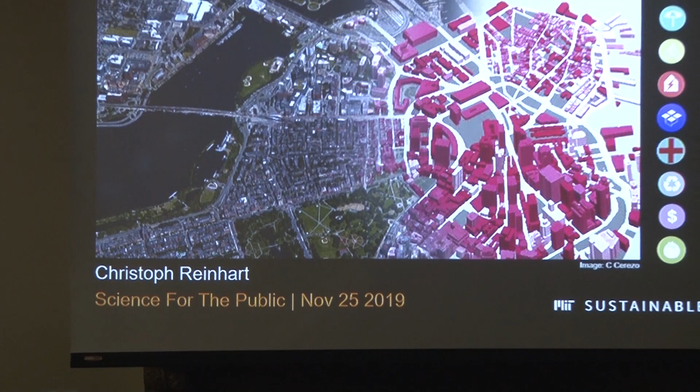The work I'm going to talk about is mostly from our lab at the urban level, but I'll also give a little introduction about net zero individual buildings. As you might imagine, a lot of this work is done by many people. This is the Building Technology Program at MIT, a post-professional degree program where you can get a PhD or a Master of Science in architecture. We have about 6 faculty working in the program on a variety of aspects: energy efficiency in buildings, building controls, natural lighting and daylighting, urban metabolism, and more efficient structures. We strive to bring all this work together with our 35 graduate students by holistically looking at the performance of the built environment.

Since MIT is a small university, we tend to focus on how we can contribute to the world's most urgent questions. So I started out today reflecting on how our work in architecture and urban planning can address the world's most urgent questions. That gets you to the question: what might these problems be? I came up with 3 key concerns for us. There shouldn't be any surprises here, and I'm going to frame my presentation trying to address these issues.

The first one, not surprisingly, is climate change. What does this mean for cities? The last 5 years have been the 5 hottest years on record. In statistics, that's always hard to grasp, but if you look at some pictures, for example from the New York Times this summer during the heat wave in June that kept the whole continent in its claws, you see how desperate the measures are. I think these guys are having fun, but ultimately it's a desperate measure to stay cool and comfortable in cities particularly.

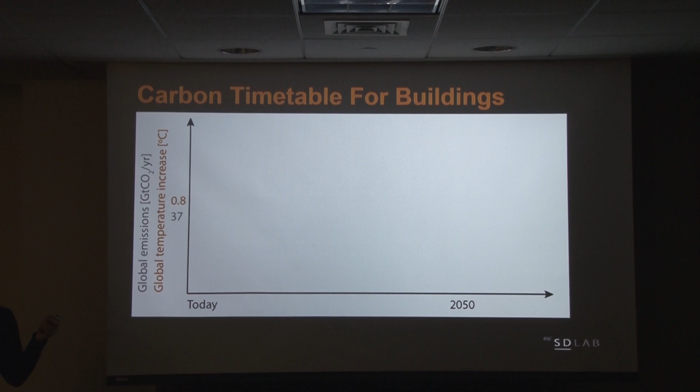And we are emitting every year worldwide 37 gigatons of carbon emissions. And now we have the United Nations, the Intergovernmental Panel on Climate Change, have set us these goals that we want to keep global warming below 1.5 degrees C to avoid the worst, or even worse effects on the environment, on sea level rise, on diversity in animals all over the world. So this is our goal, right?

And if we want to stay under that level, it means we have a total of 580 gigatons of carbon left. And that's really a new concept, because since the 1970s, the limits of growth, we've always been concerned how much gas and oil is left in the world, so how much can we burn? But this concept here basically means it doesn't matter how much is left. This is how much we are allowed to burn to stay under this level. So it changes the way the discussion should be working.

And then one other number, or one number that, if at all worthwhile, this you could take home with you. If we say everybody on this planet deserves the same amount of carbon, that gives all of us 2.5 tons of carbon per capita in a year. That would mean that we are all equal, and this is what we have left for the next 30 years.

And then, of course, there's a scary line. To stay under this 1.5, we have to reach a net zero carbon economy by 2050. And just bringing that home to buildings, buildings currently use about 40% of the carbon emissions worldwide.

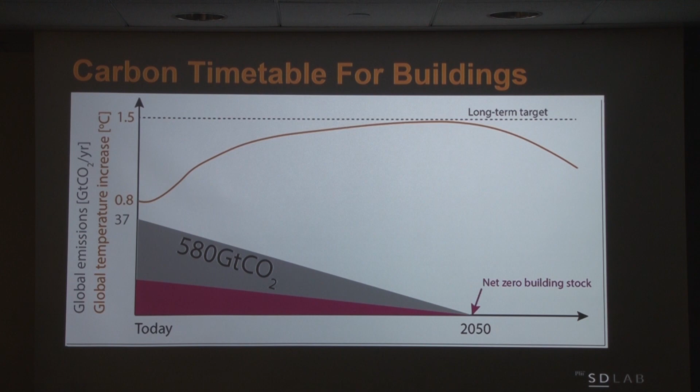Because in 10 years, if you were to do that, and we say you cannot burn any gas in 2050 anymore, you have a system that you cannot even use to its meaningful lifespan. So when you look at a graph like this, it becomes maybe clear how incredibly urgent it is that we're doing something now to the built environment.

So if you actually go historically back and look at the carbon emissions that are emitted by buildings, this might sound like a total pipe dream, because the only times when our carbon emissions haven't risen was during financial crises overall. So maybe the first question is, can we even technologically get to this point here?

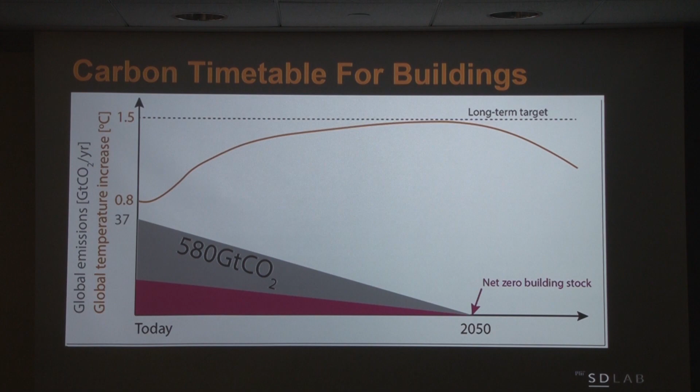Of course, the scary thought again is that in this pink triangle, this includes all new construction. And by 2030, we are expecting to build another 900 billion square feet. So worldwide, we're going to build 3.5 times the US in the next couple of years. And all these buildings have to fit into this small pink triangle. So it's an ambitious goal. It doesn't mean that it's technically impossible, but it's urgent.

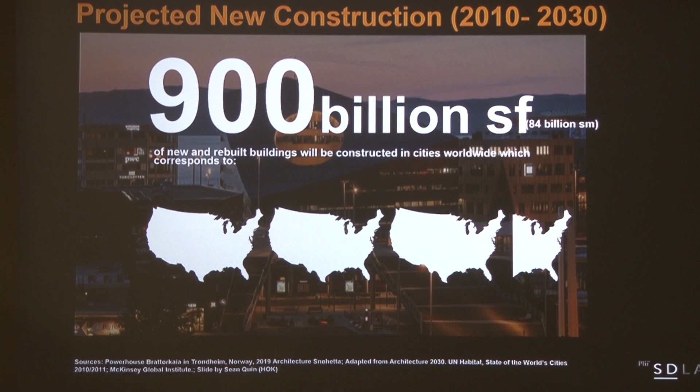So my presentation today, I want to touch on 3 aspects. First, I wanted to talk for just a few minutes about what this might mean, how to get to net zero if you're an individual homeowner. So what can you do today? And then I'm going to expand the analysis to beyond energy and carbon and talk about sustainable cities as a whole. But I wanted to bring these 2 topics together here.

So net zero home, what can you do? Imagine this is your beautiful small New England home that you just bought, hasn't been upgraded, and now you face with your partner your choices.

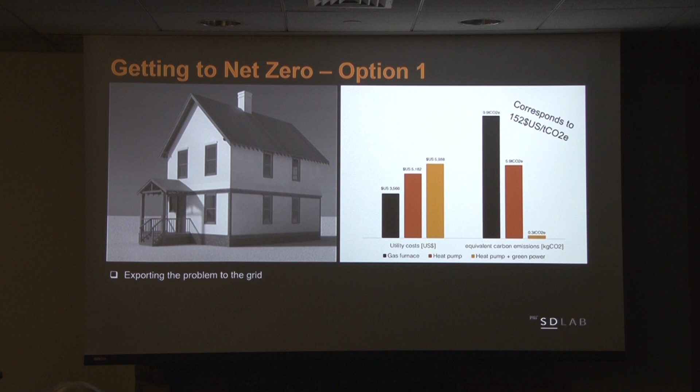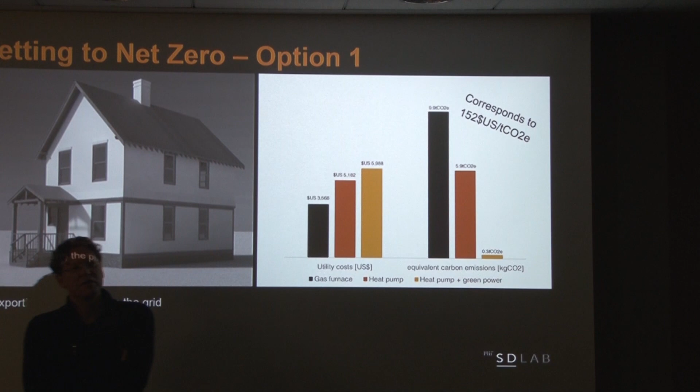What can you do? If it's not upgraded, you'll typically be paying, let's say you have an old gas furnace, about $3,500 a year in gas and electricity utility costs, and you're responsible for 9 or 9.9 tons of carbon. If you're a family of 4, everybody gets 2.5 tons. That means you can't spend any carbon on anything else anymore. This blows your whole budget, so to speak.

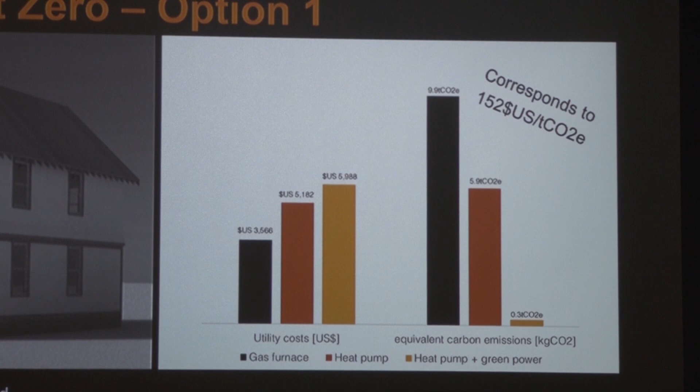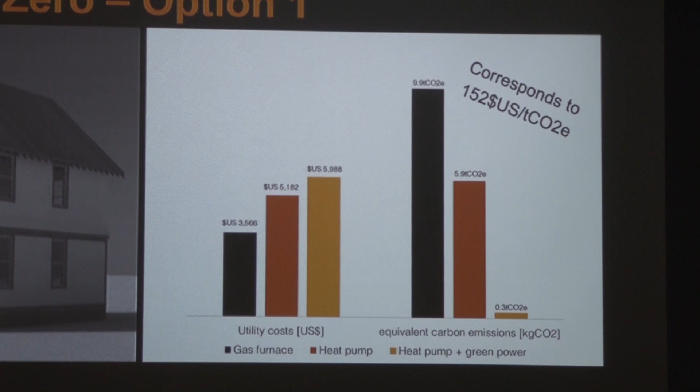So now what are some simple things you can do? You can get a mini split system, an electric heating and cooling system that you put in your buildings, that increases your cost to maybe $5,000 a year. The electric grid here is pretty clean, so that would halve my carbon emission. Just by putting in a mini split system anywhere, that already halves your carbon.

And now if you spend a few bucks more, and in Cambridge that's being offered, I'm sure in Arlington that's similar, if you get basically a green power supplier, then your costs rise to $6,000 a year, but your carbon emissions are practically zero for all intents and purposes. So that's a pretty easy way of getting your building to net zero. You can feel very good about yourself.

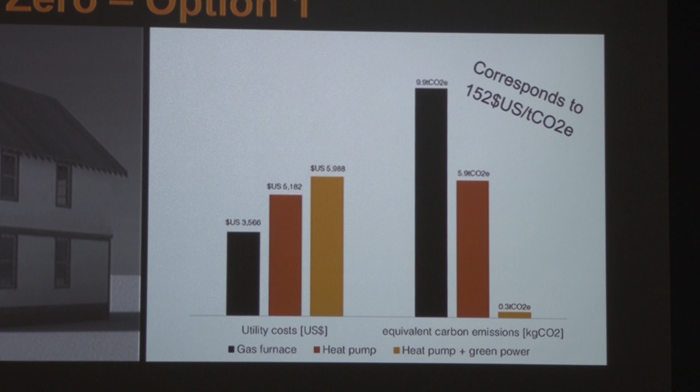What you're actually technologically doing here is exporting the problem to the grid. It means the electric utility, Eversource or whoever you have here, has to deal with all the electricity you are using. You're just putting, so to speak, PV money in the bank, and they have to manage this somehow.

If you want to do more than that, you could also go this long and thorny road to building renovations. You could say, well, I want to insulate my walls, I want to get new windows, I want to weatherstrip and tighten up my building. And when you do that to a good degree level, you have to get a ventilation heat recovery system in there, and then you get the heat pump and the PV.

If you're doing that, you're a way better neighbor. This is a huge effort, so you might not be married anymore by the time you're done with that because the effort level is so high. But this would significantly reduce the footprint that your building has on the grid.

So I just want to give you a sense in terms of options. In both cases, you are net zero, so to speak, but one case is way more thorough than the other nowadays. And of course, when you live in the neighborhood here, you will have a hard time just getting a good contractor that helps you to get to that level efficiently.

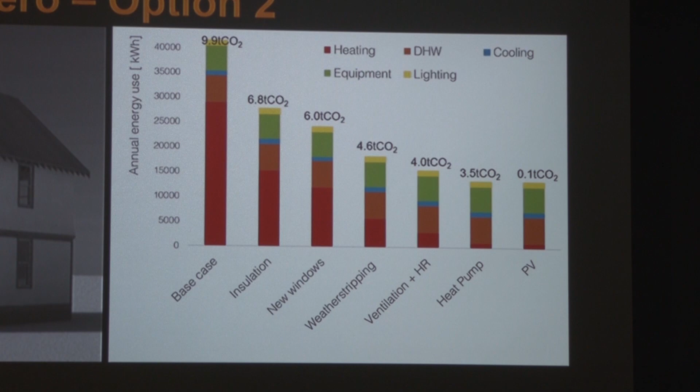So that was more the preamble for individual buildings. What can I do getting carbon emissions down? In our lab, we've been focusing more on this whole notion of sustainable cities, innovation districts, and so forth.

When people are coming to Kendall and to MIT and this whole part of the world, a lot of cities are interested in an innovation district. So what is that? Kendall Square is a great example. Typically, you have a lot of economic opportunities, meaning you have an anchor institution, or several, that provides a fresh supply of a well-educated workforce. You have a startup culture, and this creates a lot of economic value.

Obviously, every city wants something like this as an economic motor, and if we think back, we need this so that we have good jobs everywhere in the world. So then really the environment itself is only there to attract and keep this highly qualified workforce.

So we need a walkable, mixed-use environment. You can have micro-units, meaning since everybody's working in the Kendall Square area all the time anyhow, you can have smaller units overall, but you need vibrant public spaces, organic food, yoga, all these things. And then energy efficiency and comfortable workplaces are kind of the third tier here.

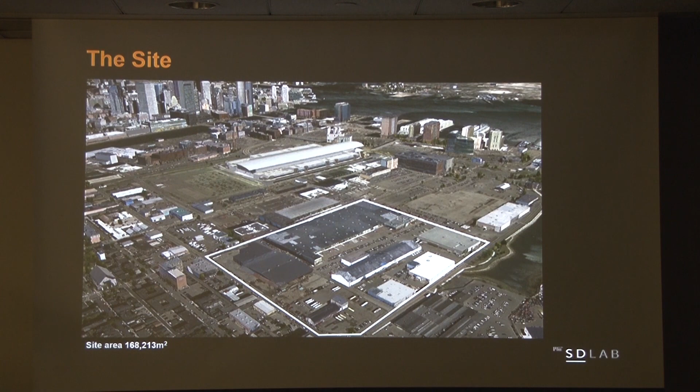And this is what I wanted to show you. As an example, it might be especially easy for you to understand because we picked this neighborhood just next to the Innovation District in South Boston. This is an area that's actually slated for development. It's 170,000 square meters, so 1.7 million square feet. This would be a typical sustainable urban planning proposal for a neighborhood like this.

You could basically get here a mixed-use neighborhood, meaning you have both residential and commercial together. You can have a total of maybe 16,000 people living here, 250,000 square meters of residential, and 130,000 square meters of retail and office space.

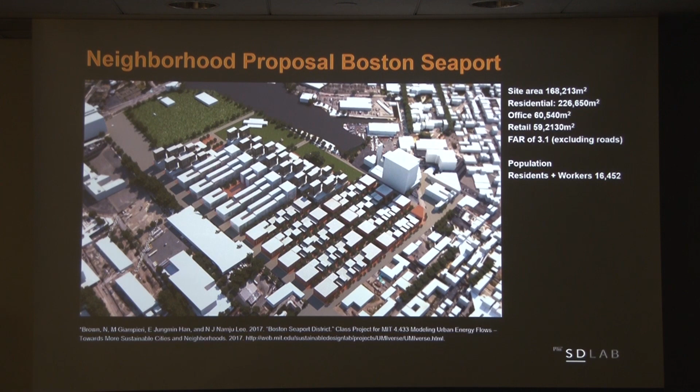So when you look at something like this, is this sustainable or not? It becomes very hard, just by looking at it, to compare different options and say how good a neighborhood like this is. So we're going to look at this under 8 different angles, trying to understand how well this neighborhood performs and whether we could do better. That's of course the key question, especially in urban planning: what are the metrics that shape and form the city?

Maybe surprisingly, energy use is less a form-giver than other aspects. The two main form-givers for cities are actually transportation — how do I lay out a street grid that people can walk and bike through — and streets stay forever. If you look at a street grid of Cairo from 3,000 years ago, it looks still the same. So whatever we decide doesn't change.

And then the next important part is having access to good light. You can always upgrade the buildings after the fact, but if we have certain massings and we don't let light into the city and onto the streets, then there's no way of changing this after the fact. So what we mostly are working with here is access to daylight.

This gets more into the research that we've done over the years: how do I make sure that my city is livable, that we have enough access to natural light, and we're not all the time in the dark? For this to work, we developed this, I would say, 5-point plan.

How do you, as a researcher or as an individual, find a good urban metric? Because right now the literature is full of proposals for how we should look at the built environment. I think you have to go through all these different steps to see that this is a good way of looking at it, that it's a meaningful lens, and that it does what you want it to do.

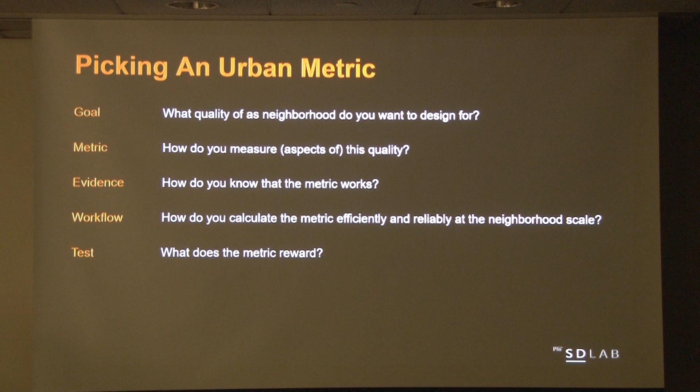So for daylighting, I'll just walk you through the process. Daylighting is providing ample natural light over the course of the year to people in a building. This is one of the oldest concerns in architecture, obviously, especially before electric lighting was invented. The history of architecture was the history of the window, as Aalto said — it's not as extreme anymore, but it's still one of our key qualities.

So nowadays you would look at an architectural plan like this, by looking at the climate and doing a calculation over the whole year, then saying how often people have light in this building. The way we visualize this nowadays: if half the year, when you're in the building, you have enough light, then it's daylit — otherwise it's partially daylit or not daylit. That works pretty well in architectural practice and in the studio. When somebody shows you a building, you can do this quick analysis and decide whether it's well daylit or not. This is a metric that was invented a couple of years ago.

The question was really: does this actually map well with what people say in buildings? So what we did when I taught at Harvard was use Corbusier's Carpenter Center, second floor studio space, which is a building in your neighborhood. Everybody in the class, before they got spoiled with education, just innocent aspiring architects, got floor plans and had to draw where they thought daylighting would end in different spaces.

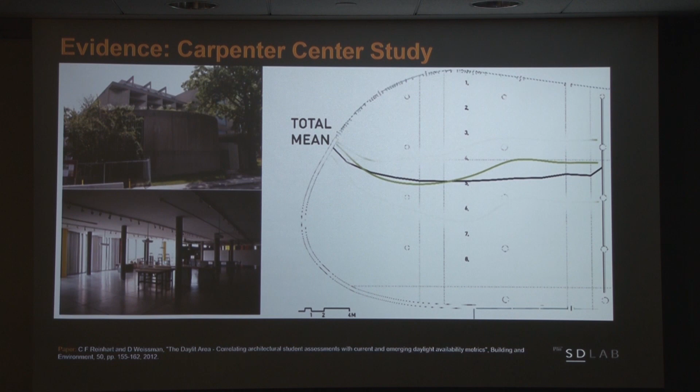We overlaid this and had basically a democratic vote on which part of a building is daylit, and compared that with our computer-based attempt. In this one space in the world, we were really lucky, the overlap was really good.

That was encouraging, so we repeated that with universities across the US, South America, and Egypt, and found similar evidence, which is pretty rare in architecture, that you get to the point where you can say this metric tells you what people think where daylight is. That's pretty useful, because ultimately we do all of this for the occupants in the building. So we were happy that we had that.

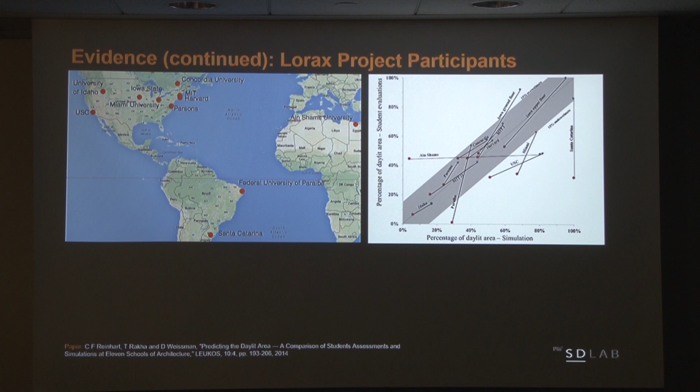We then found a way to do this type of analysis for a whole city. So what I just showed you, I can now pretty effectively do for the whole of Manhattan, for example. I can tell you how daylit Manhattan or downtown Boston is.

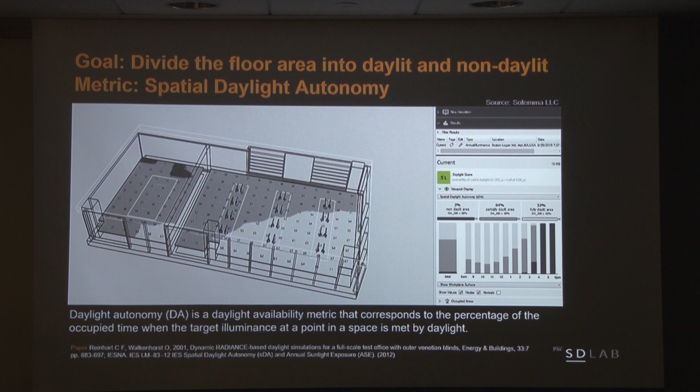Now that we have this tool set, we wanted to understand what are the cities or urban forms that are getting rewarded by this metric. Some of you might know that the oldest urban zoning regulations for getting access to light and air at street level in cities come from Manhattan.

These regulations were from the 1910s. Manhattan was the first city that said, because of very dense urban canyons creating unlivable street conditions, you have to widen the amount of light you get at street level. If you look at a building like the Rockefeller Center, it's basically built according to that, with a step back — that's the maximum the developer was allowed to build. So we wanted to see, can you build in Manhattan denser than the Rockefeller Center?

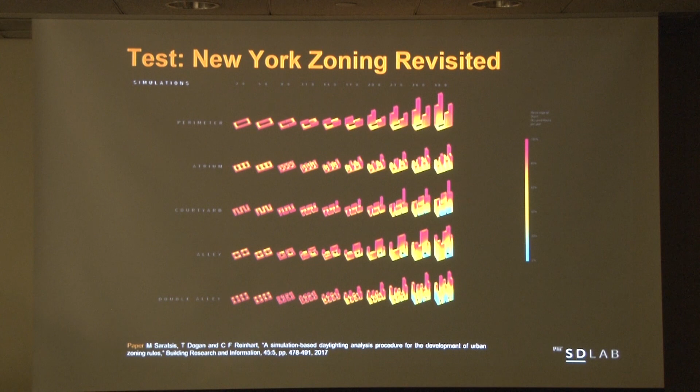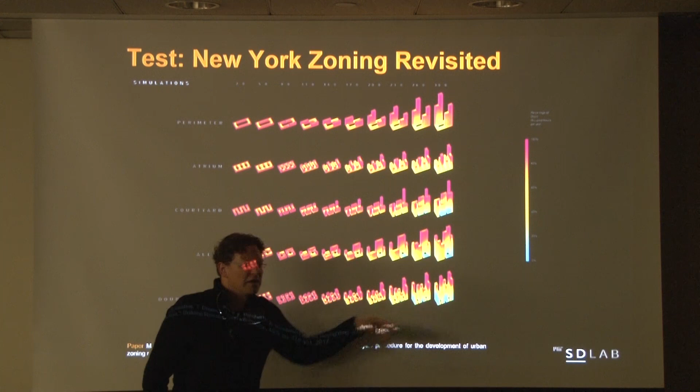For that, we looked at different typologies. Here you see various urban setups, where the same architectural idea grows. These buildings become incredibly dense, 3-4 times denser than Manhattan if we were to build a whole city that way.

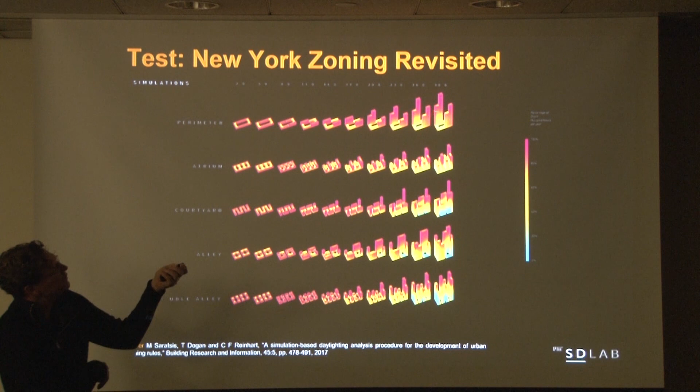We wanted to see if there are urban forms that are good for lighting or not. I'd like you to pay attention to this top form — that works very well. These are effectively several stories of commercial base at the bottom, then a stacked, very thin tower. If you look south of Central Park, that's the kind of urban typology you see. Now I'll show you how good these different typologies actually work in a city.

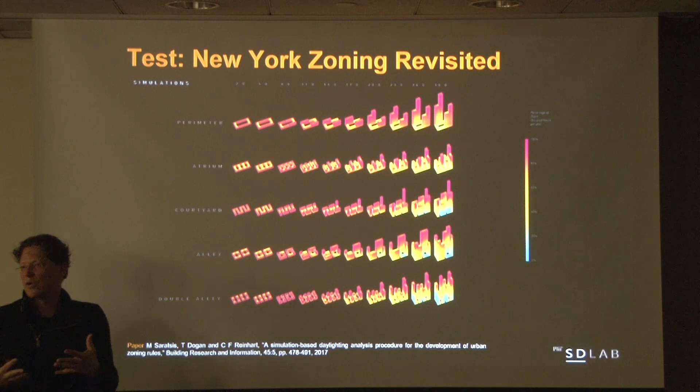Here we see them growing by density, and this is a good lighting level. The top form I showed you, these thin towers, perform way better than the others, to incredibly high levels — this is the maximum you can build in Manhattan. So we could basically double the density in Manhattan if we built according to that.

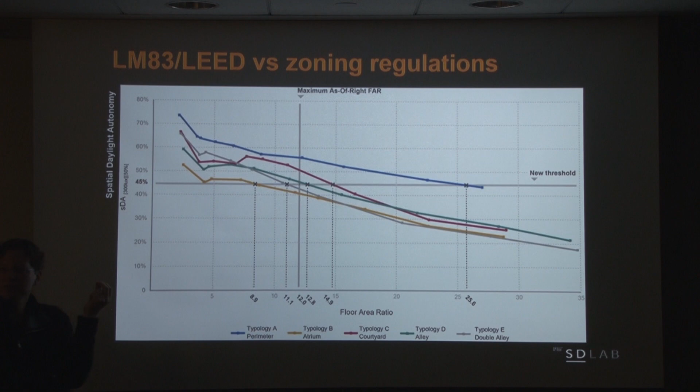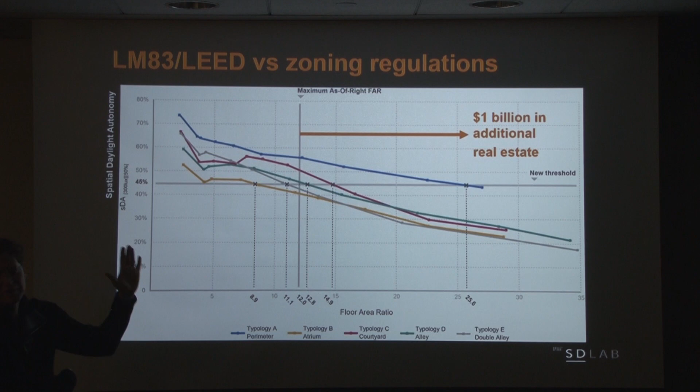That takes me to the earlier notion that we have to house a lot of people in cities. We don't want urban sprawl, so we have to densify. There are ways of getting a lot more living space into cities if we build that way. And of course it's interesting from a developer standpoint too — you're creating, if you do that in Manhattan, $1 billion worth of real estate per building block. So that doesn't hurt if you're the developer.

If I apply that to the neighborhood I showed you before, when we were asking whether it's a good neighborhood or not, it turns out it's not that great — basically not Gotham yet, but barely acceptable. The reason is there's a height restriction here: you can only build up to 7 stories high. So if you have to design that much floor area, you basically box yourself in, literally speaking.

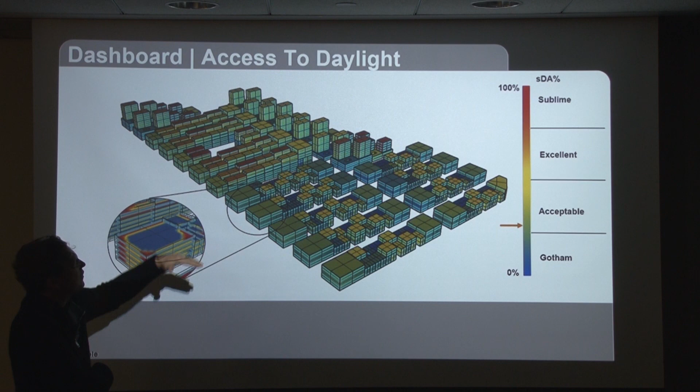That just shows we have to do educational work with cities, explaining that you have to relax some of your growth and height requirements if you want density and light to work together. Because the fear is, of course, that if you allow higher buildings, everything is just going to rise up. You just have to find something more clever than that.

So now we have some light, hopefully, in buildings. But what do we actually know about how people use buildings? What if we design all the spaces and nobody's there, ever?

That is hard, and it's a moving target because working patterns are changing. We always say in the lab, most students don't like to come in, or they spend some time there, but they think their most productive time is elsewhere, like a coffee space, working uninterrupted. So we just have to accommodate these changing working patterns and understand when people are where in buildings.

In order to do that, we worked here at this place in Cambridge that you might know. This is the MIT North Court. It's located near the Stata Center and the Koch Institute.

It's a public space, and it's very vibrant. There are all kinds of benches here. It's being used extensively by people from the whole Kendall area as well as the MIT community for lunch, because there are 2 public cafeterias there, and you can sit inside and outside. So for us, that was a perfect spot to study, because whoever is sitting outside has the choice, since they could sit inside as well.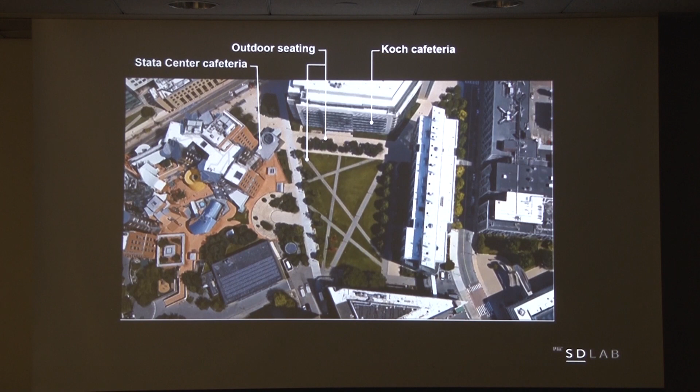So when we wanted to understand how people use dense spaces like this and when they use them, we used 3 of these Soofa solar-powered benches that you might have seen. There are more and more in Boston. These are red benches with solar power where you can charge your iPhone, and they also have a Wi-Fi tracker in there.

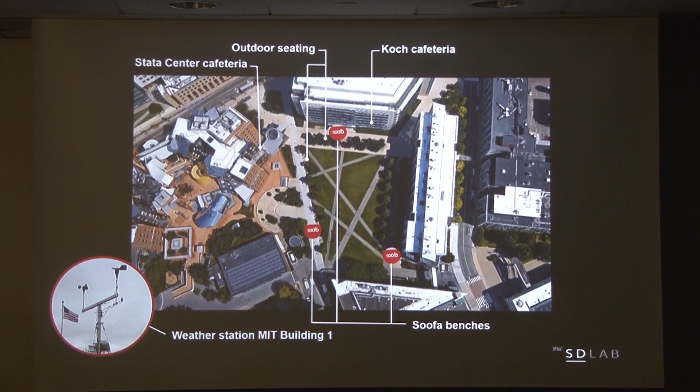So what we've done is have Soofa collect, for 11 months, all the signals that smartphones were sending out. This is maybe a little lesson in privacy in the modern age. If you have a phone and the Wi-Fi is on, your phone screams non-stop into the world, 'I'm a phone, and this is my MAC ID.'

Now, we didn't keep the MAC ID. We just changed it into an encrypted ID number, and we threw it away after the study. There are lots and lots of companies that collect this all the time. You can put a Wi-Fi sensor in front of your living room and collect everybody who walks by. That is totally legal and fine.

Just to give you a sense, in this case, this is what we collected, and this next graph shows you what you can basically gather here. So we collected, in 11 months, 30 million probes. We had to clean them up to 14 million probes, and we threw away the weekends since we were interested in weekdays.

And then we got 670,000 visitors to MIT and 16,000 regulars. How do you know what is what? Because your phone gives you the same MAC ID, so you can say this is somebody that is here at least every 2 weeks.

From a scientific standpoint, this is absolutely great, because we wanted to know how the regulars use the space, and usually cities don't know that at all—when and how it's being used. We wanted to know it for the regulars, because when you're visiting from far away and it rains, you're still going to go there; you're not going to say 'I'm going home.' Whereas when you're a regular, you can decide, I want to have lunch outside now or not. So it becomes very specific.

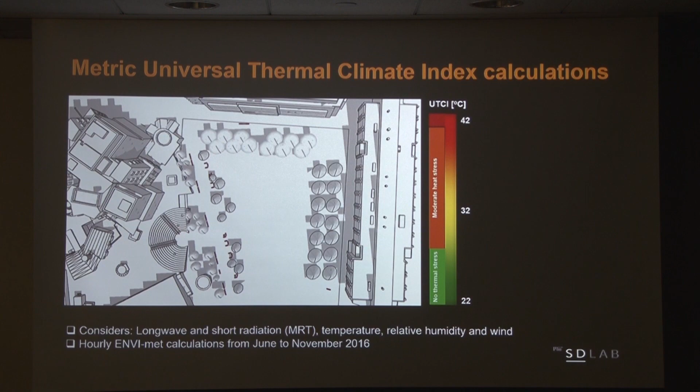So this is how this looks, where it's wet, it's hot — this is just to give you an example. We did that for the whole year, and the work was done by Jay Dhariwal from our lab. He spent 1.5 years on the next graph.

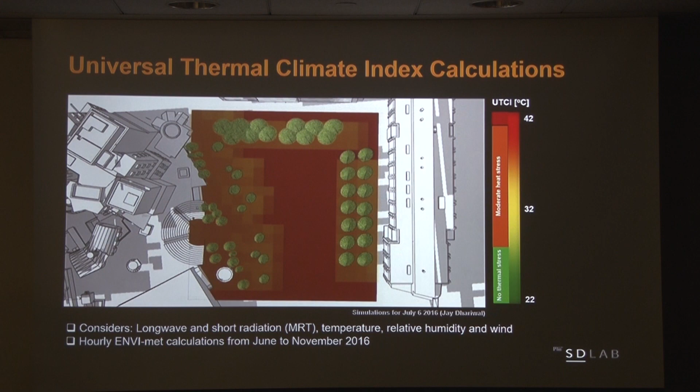So with this, we could effectively show that this metric is exactly what you should be using to model outside conditions in cities anywhere. You can, for example, decide where to put the next public library, whether the library should have a cafe so people actually stay and support it, or where to plant trees so people walk along that way, making it a more walkable city. That's a really powerful tool overall.

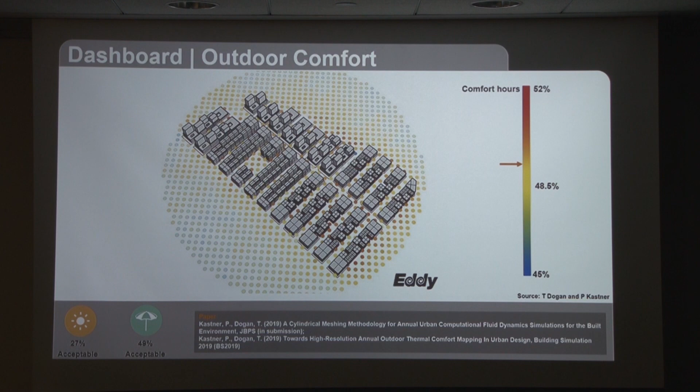So now at least we have a good, powerful urban metric. When I apply it to this neighborhood, it's not that exciting, because it wasn't developed with this metric in mind. It effectively tells you that half the year, on Boston streets, it's not comfortable — which, as you live here, you know is true. So we should be more deliberate about putting in shading systems, heating pavements. I think there are a lot of interventions we can do, because the value we create for society by getting people walking is substantial.

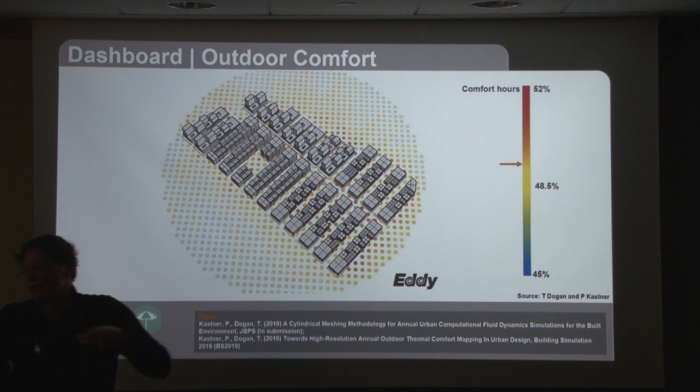So this leads me to metric two — the others will be a lot faster. Now we basically can say we know how to get light into cities, we know how people are comfortable. Now we have to give people destinations — that's the next step, because people need a reason to walk out. There has to be a restaurant, there has to be something.

Fortunately, there is a metric called Walkability and Walk Score. I'm not sure if you know it — it's called walkscore.com. You can look that up for any address in America, and it basically gives you, for an address, how many amenities you have in the neighborhood — how many schools, restaurants, and so forth. Then there's a fall-off: the further an amenity is, the less it counts.

What do we know about how this metric works? Well, we know that people who live in a neighborhood with a high walk score weigh on average 6 to 10 pounds less — that's a very indirect metric, but that's what the statistics tell us right now. We also know that a point of walk score adds $3,000 to the average real estate value of your property, and typically a walk score goes between 0 and 100, so that's not nothing.

And yeah, you have to be careful — this was developed for the US. We've done this in other parts of the world as well, such as the Middle East, where the distances people are willing to travel are a lot shorter overall. So if I apply this to my neighborhood here, everybody was super optimistic — this whole neighborhood is basically covered in cafes and restaurants. It's very walkable.

We don't have yet a finance model that sees how many of these cafes are actually going to make it, but in principle, when we start out, this is walkable.

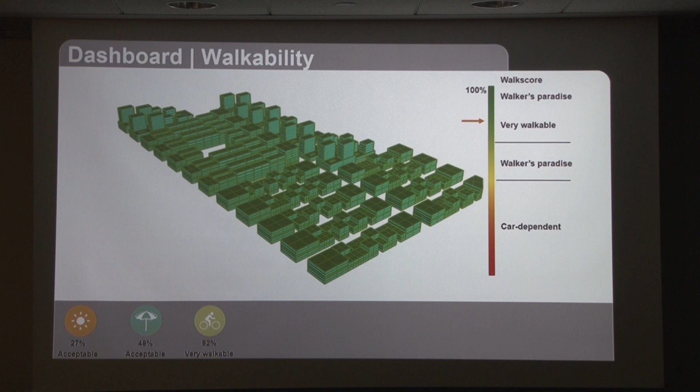So now we get to energy. Energy for new construction is a lot simpler than what I showed you before. When you have an existing building, it's a very tricky thing. You don't want to take down the existing building, but upgrading a building is very costly and very complicated.

Defining a stringent building code is a lot easier, and we know from studies in California and all over the world that people follow, thank God, the building code. So for example, if in Kendall we say every new building has to be LEED Gold or whatever, people build to that level, and then we know the energy use is there. It's the hardest problem for us getting the existing buildings up to speed.

So that means in this neighborhood, since we're building it from scratch new, we are assuming slightly better than Massachusetts code. We get pretty low energy use overall.

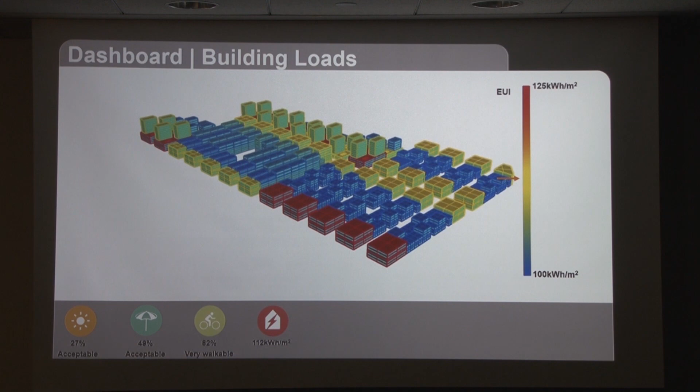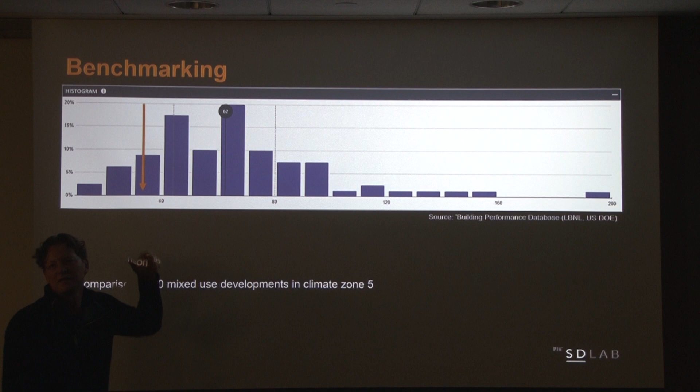And then the way you would now judge, is this a good energy use per square meter compared to other neighborhoods? There are data sets out there that compare mixed-use neighborhoods all over Climate Zone 5, which Boston is located in, against your target. So you could say, well, this looks good, I'm in the top 20% or so. This is a way an urban planner could gauge whether this is efficient as a building stock or not.

Now the next part, that we are starting to discuss more and more, is where's the energy coming from? When I said earlier, well, I buy a heat pump and I buy green PV, photovoltaic, that exports the problem.

What that means is somebody, the grid utility, has to be responsible for getting us clean energy and using this clean energy, and that's a difficult problem. With photovoltaic, it's easy to understand: the sun doesn't always shine, but people want always energy. So there's this mismatch, and somehow we have to bring those together.

So we looked here at 3 different systems that are currently under discussion for a new neighborhood. The default would be this: by default, everybody, that's probably what you have at home, you have a gas boiler in the basement, and you just get electricity from the grid. That is pretty normal. Now what you can do instead is go what is called all electric.

So you throw away your gas boiler, or you never had one, and you basically have heat pumps—electric heating and cooling systems. If they are large, they use heat from the ground; otherwise they can just get heat from the ambient air. In that case, I only have electricity, and I heat and cool buildings with that.

Or, and this is what you typically find when you have one joint owner, for example Harvard, MIT, the utility buys gas and creates its own electricity, heating and cooling centrally with a district system. That is very common: you have one central plant that creates heating and cooling, and then steam pipes connect to various buildings. That's what we've done for at least 50 years.

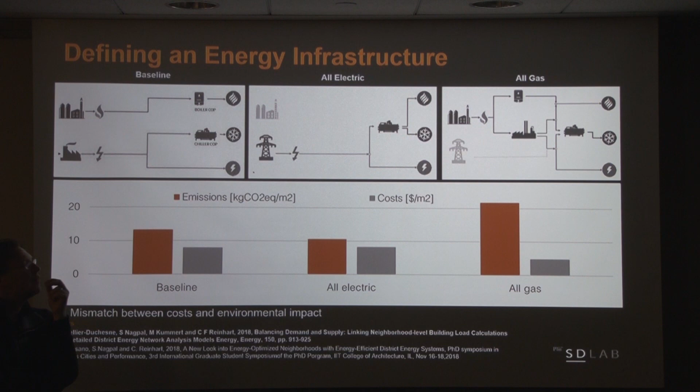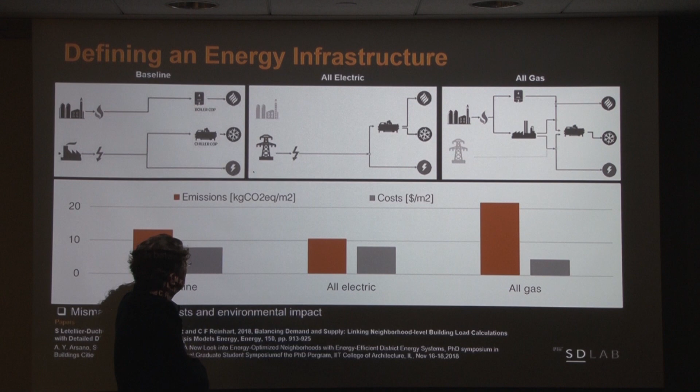So now, how do these decisions, these systems, pan out from an environmental and from a cost standpoint? If you go all electric, shown here in orange, you have the cleanest system in terms of carbon emission. If you go all gas, you have the cheapest. That is super important—it makes it even harder for us to save carbon because we have a mismatch between the economics and the environmental concerns. So why is that?

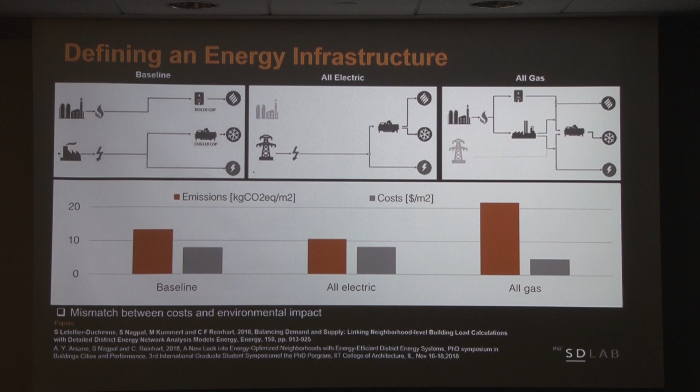So what happened is due to hydraulic fracturing, or fracking, we have a huge amount of very, very cheap natural gas. And over 20 years, that basically knocked out all the coal and oil-powered power plants—they just went out of business. So that means today, most of our electricity comes from gas and from renewable. Renewable is carbon neutral.

Gas has a way better efficiency than coal and oil, so people always thought this was a good idea. And if you look at the carbon emissions from our grid, they have halved over 20 years. That's really interesting. If you've done nothing, you can still pat yourself on the back and say I use half the carbon I used 20 years ago because my grid is so much cleaner.

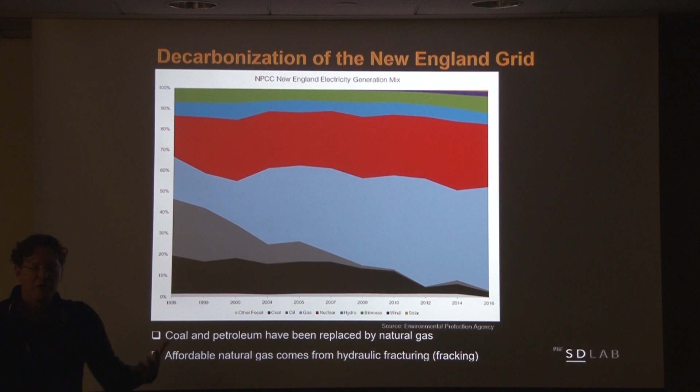But now that starts creating a problem because nothing is replacing the natural gas. And if we say we have to get out of this natural gas loop, it's actually stopping, for example, solar hot water systems that are being used in other parts of the world. Nobody has that here because the gas is just too cheap. So now we have to basically start deciding how do we overcome that, which is a problem.

So in our neighborhood here, we just said, okay, how much do you actually pay? What is the actual pay difference you're looking at? If I want to switch from gas to all electric, then everybody in my neighborhood pays $90 per year. That seems feasible, and with that I'm halving my carbon emissions. So effectively we have to decide between what the individual would decide - is $90 enough - as opposed to what is the cheapest solution we can overall have.

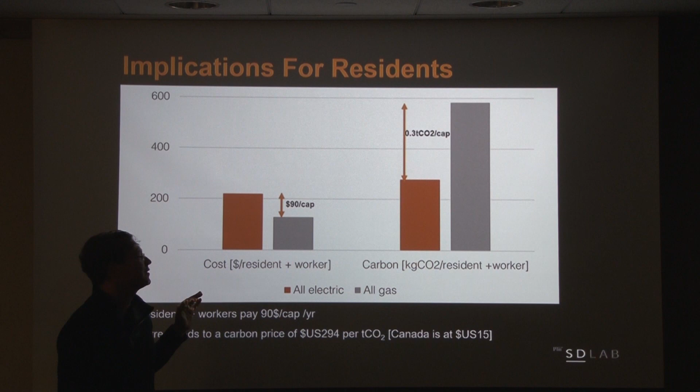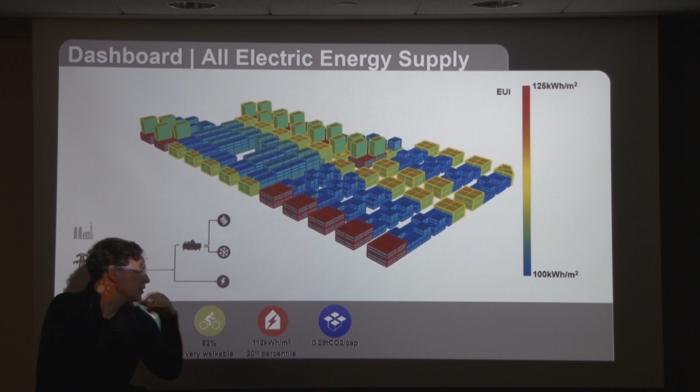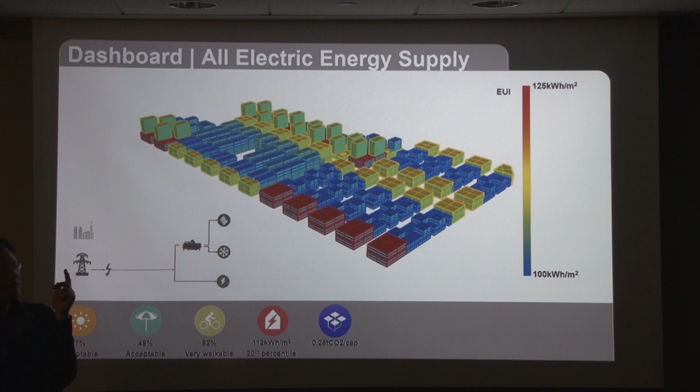So in this case, we said $90, innovation district, no problem. That's, of course, a positive attitude that the developer goes with. But we basically say that would be our solution here, an all-electric system. So now I end up with only 0.3 tons of carbon per person. If you think back, the New England house we started off with was 2.5 tons per person. So this is significantly better. These are our solutions for buildings.

Now you might think, well, what about photovoltaic? Is anybody here has a PV system on their roof? Awesome, very good, great. So what about PV for a whole new neighborhood?

Well, you could get carried away and fill the whole neighborhood with PV. That might not necessarily be the best idea from an urban planning level, because you want all this density and people, you want them to enjoy the city. You want the Rachels and the Joeys on the rooftop partying as well. So I think there has to be more diversity.

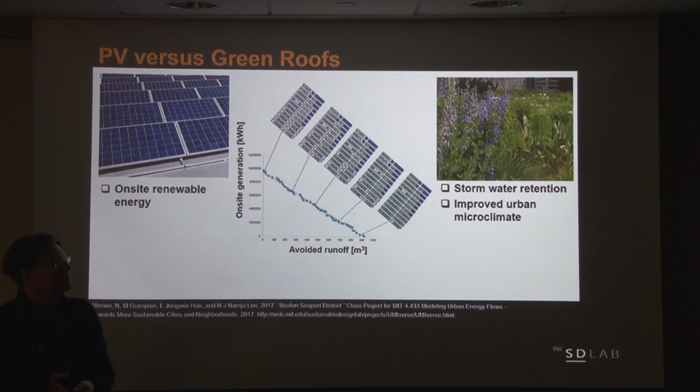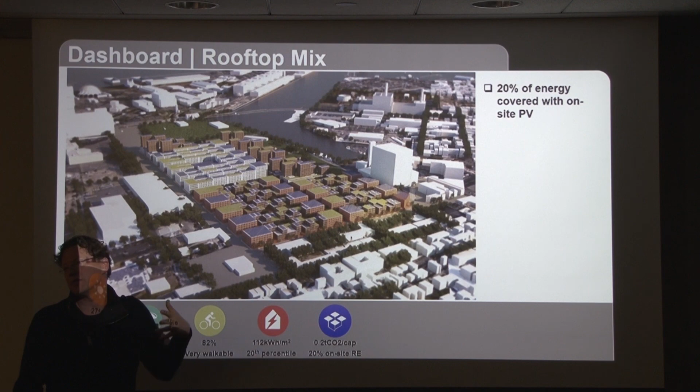So we said we're just going to cover about 20% of the rooftops with PV. The rest of the PV, if we really want it, can be outside because we can just wire it in - it's cheaper anyhow. And that way we can manage stormwater better, and we have more vibrant neighborhoods. So this is how this would look if you were to cover 20% of your electricity with local PV, and the other green roofs are for other purposes because rooftops are valuable.

And so this is some new work that we're adding towards that, which is how can we help owners decide that they're doing some good in the world, and what is that good work worth. This is work that we do with Harvard School of Public Health, Memo Cedeno and Joe Allen, who have quantified for all parts of the US, if I'm avoiding fossil fuels, how much favor do I do to society?

So the avoided cost to society by using less fossil fuels - basically the costs come both from reduced climate change as well as prevented health outcomes. So if we put a price tag on having all electric instead of all natural gas in that neighborhood, we are saving society $400,000 in this case, which comes out to $25 per year.

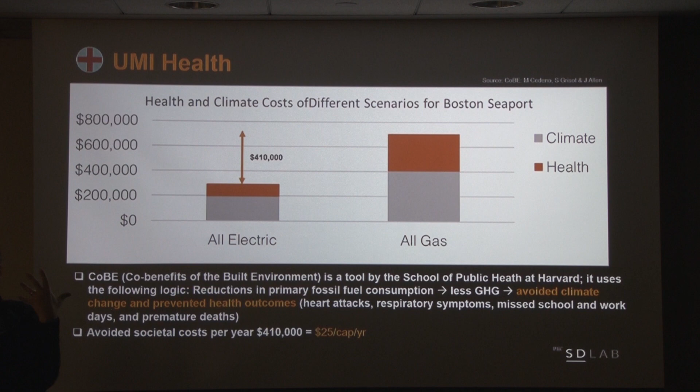Now that's nice, so you can say anybody who moves into the neighborhood, that's the good you do. Of course, it's important to understand nobody's going to give you that money. That's something good that you do for society that nobody pays you back for, but it's important to realize that this value is there. So this is where we are.

There are a few more concerns to cover here. One is embodied energy, which is something we haven't talked too much about, especially outside of academia, but it becomes more and more important. This is the amount of energy and carbon that's required to build and maintain buildings. And it's easy to understand - when you pour the concrete, that comes at a huge carbon emission price tag.

So how does this compare to my utility energy, operational energy meter? Traditionally, we've said this is very low, less than 15%. But if you think about it, over a 70-year lifespan of a building, the embodied energy tends to be low.

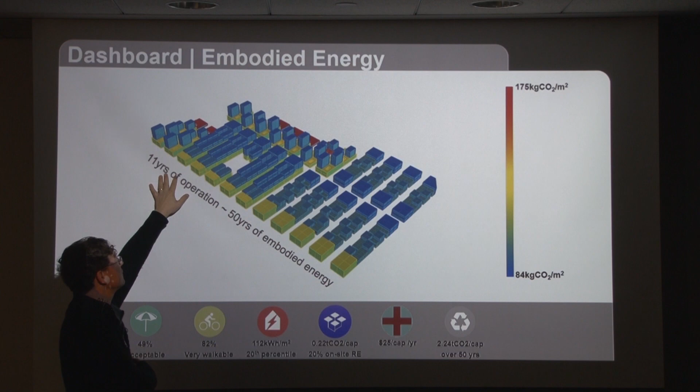Now, of course, when we follow all these concepts that we talked about and we have a net zero building, then the embodied energy is everything that we have. So over time, this will become more and more important. For our neighborhood here, we can say for a 50-year lifespan, about 11 years of operation correspond to that. So it's about 2.2 tons of carbon per person, but over 50 years.

The main argument why we should pay attention to embodied energy is, of course, when we build a new building, all this carbon is used now. So if we have 550 gigatons of carbon left, anything we're building, even if it's a low energy building, we are burning our budget down really, really quickly, which is ultimately an argument why we should do refurbishments, renovations of buildings, rather than just building new from scratch.

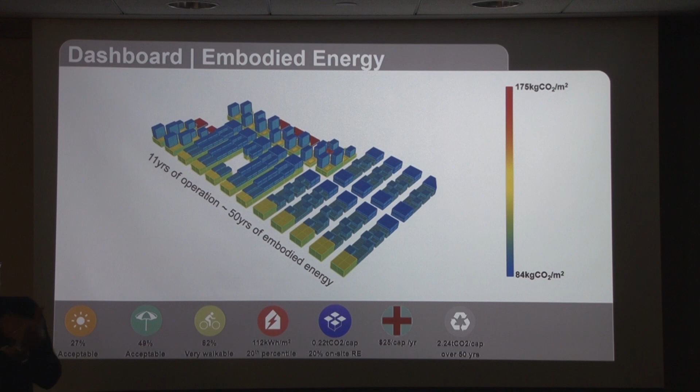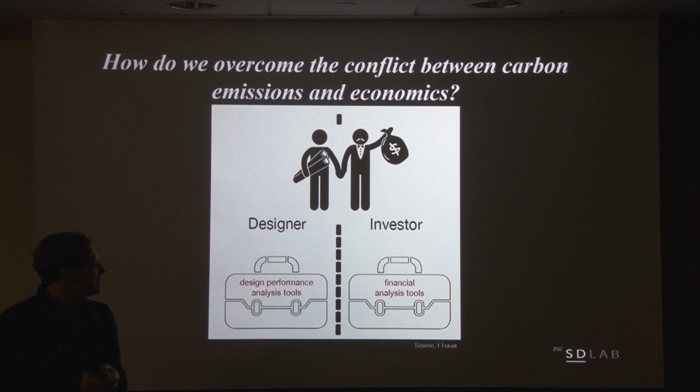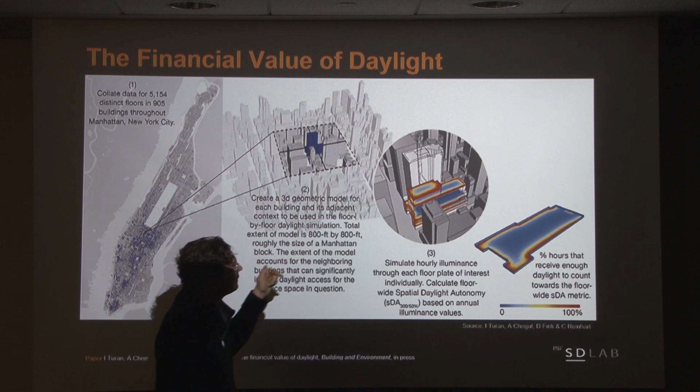Since we've always been working extensively on daylighting, we started looking at daylighting first, more specifically in Manhattan. So we got for 5,000 rental commercial spaces in Manhattan information about what people are paying, everything the real estate sector knows about these 5,000 floors. And for 5,000 floors, you see them all here in Midtown, Lower Manhattan, we created an urban model. We calculated for every hour of the year the light that falls onto every square foot of that building, and we can then deduce how daylit is this floor.

And we threw that into something that the real estate sector calls a hedonic pricing model. This is what they use all the time. If you think you're in real estate, you want to predict how much rent you can charge for your building, right? So you basically throw in things such as how old is my building? How is the economy doing? Where is it located? Do I have high-speed internet, transportation, accessibility? And based on that, they come up with a number and then hope for the best that somebody's going to pay the price. And what we did here, we threw in basically what they didn't have before, access to light in there. And we found that in Manhattan, just having access to light on a floor increases the value by 5 to 6% on the rent or the mortgage that you pay.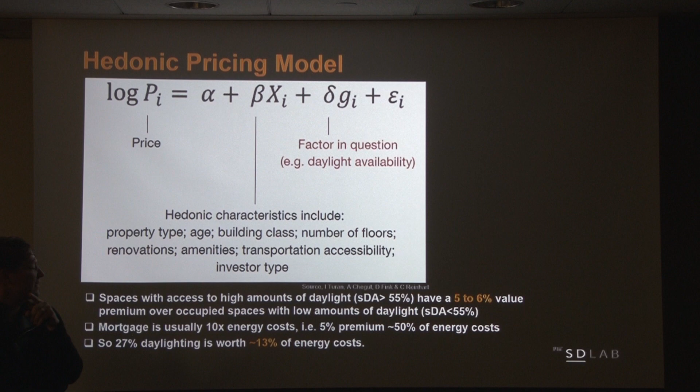And then finally, and this has been really fun, we've been starting to think about food as well and how much does it matter what you eat in terms of the carbon that you're generating. We've been working with a company out of South Boston called Freight Farms. They're selling these refurbished shipping containers. Here you see one from the inside. So these are systems, these are food machines. You can put them in your basement or anywhere. You basically condition the space, you have these grow lights, and you can grow enormous amounts of food in there. And we wanted to understand, well, is that a better idea? What about green fields? What happened to green fields?

We did a very extensive measurement on one of these containers, put a weather station on the roof, and tracked all the food that comes in and comes out. And it turns out that in certain areas, including in Boston, it is actually carbon-wise better to grow some of our food in these containers than what we're currently doing.

The reason for this is, of course, the food miles. If you think about it, the average tomato travels, I think, 3,000 kilometers to Manhattan, because only 15% or so come from the Hudson Valley, but New Yorkers and Bostonians eat tomatoes all year round, so the rest come from California and Chile.

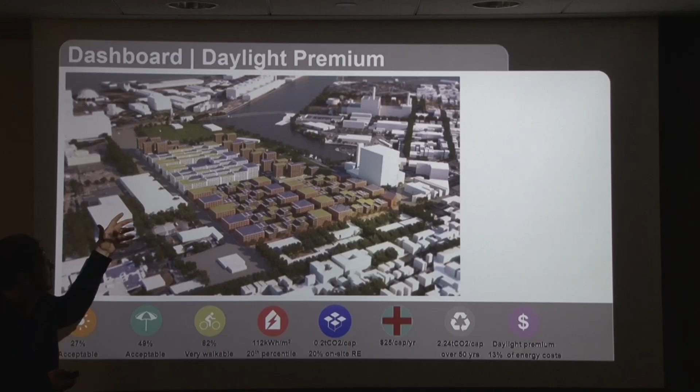How does this pan out at the urban level? We assumed we would have 30% average Joes, 50% urbanites, and 20% vegans in that neighborhood. And now we wanted to say, well, can we feed everybody with these types of containers, at least for the produce? This is how a city like this would look like.

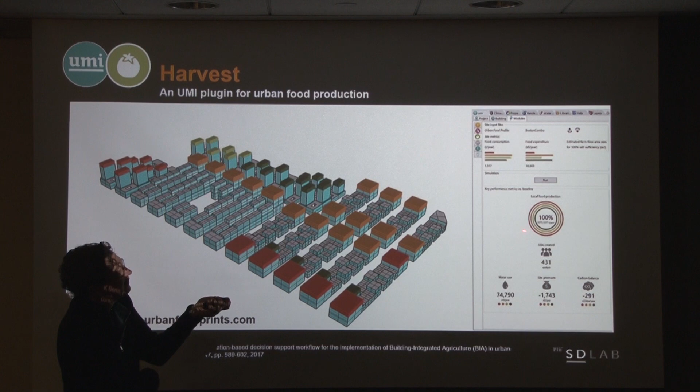You don't have to put them on the rooftops — it's more to give you perspective. So if we want all the produce locally generated, we have this tool that's like the Apple Watch: you have to fill your rings for all the different food groups. If you do that, let me see if I can get some of the numbers.

We have a budget of about $11 million — this is what 15,000 people would spend on produce per year. And the extra cost of creating all of this locally is about $1 million. So we basically have to hope that people are willing, much like with organic food, to pay this extra premium.

But the nice thing is, especially thinking back to the beginning of the lecture, we would create about 430 jobs here — new jobs for people taking care of these containers. And I think that's probably the biggest driver, because $1 million a year for 400 jobs is nothing. Otherwise the whole system pays for itself, and in this case we'd also save about 300 tons of carbon.

Not a lot — the reason for this is that we are growing all produce here locally. Typically there's some low-yield produce you wouldn't grow in these containers because the economics just don't work in your favor, so you start with herbs and salads typically. But it's just to give you a sense of how something like this would pan out for a city.

So I have, how are we time-wise? So we are here, I have a couple more slides.

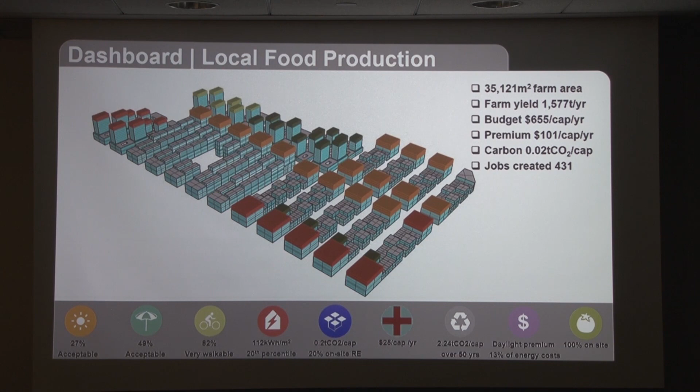This basically allows us to look at a city like this way more holistically. We can basically say, how well is it daylit? How likely is it that people are going to walk around the city? How efficient is it from an energy standpoint? Can we create local green jobs? And how much food do we get overall?

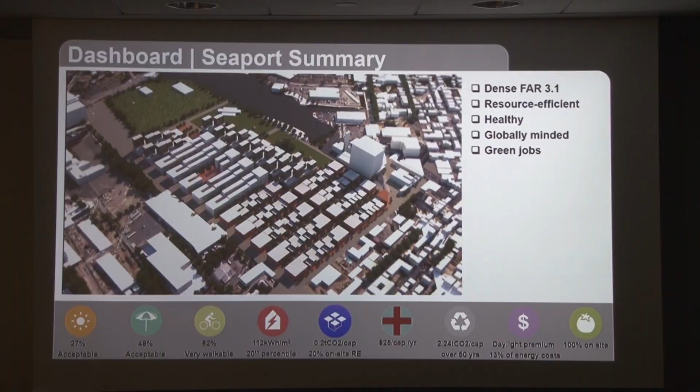The last few slides are just to show you a little bit, because we try to have an impact. How do we change minds? If we show that to people, are they going to believe it or not? I'll give you three little case studies where we tried to do that.

The first one was pretty traditional. We had been paid by the government of Kuwait to develop one of these methods. So Carlos Cerezo, Nathaniel Jones, and I from our lab put on our best suits and flew to Kuwait. We met with basically 20 people from industry and government and showed them, with the methods we developed, how they could reduce the carbon emissions of the whole country by 85%.

So here, this is the city of Kuwait with various off-the-shelf upgrades, some PV — this is how low you could go. And we just wanted to see how they would react to that.

Nobody questions content-wise what we've done. Everybody believed us. They just wanted to know, does this pay for itself? Understandable. And we could say no, because in Kuwait, they sell electricity for less than a cent per kilowatt hour, even though it costs them 16 cents per kilowatt hour. So that's not a winning economic strategy to begin with, so nothing really pays.

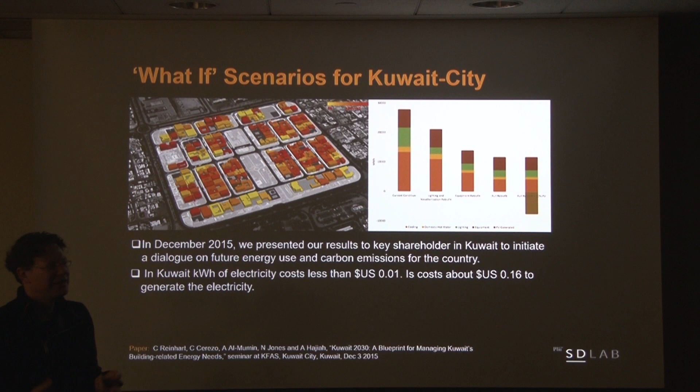So then we had this discussion: well, you should raise your energy prices and have tiered pricing systems. This is really funny, this is what happened after we had this discussion. They announced they're going to introduce tiered pricing systems. And not surprisingly, since the locals were used to paying very low for their energy, they complained and said we can't do that. So people question whether it's really a good idea to change appliances in buildings and so forth.

Don't we just need a better air conditioning system? But physically speaking, when you live in the desert, you should actually have efficient appliances and efficient lighting, because otherwise your equipment heats the building, so you have to cool away twice. So anything you save on the equipment saves you double, so to speak.

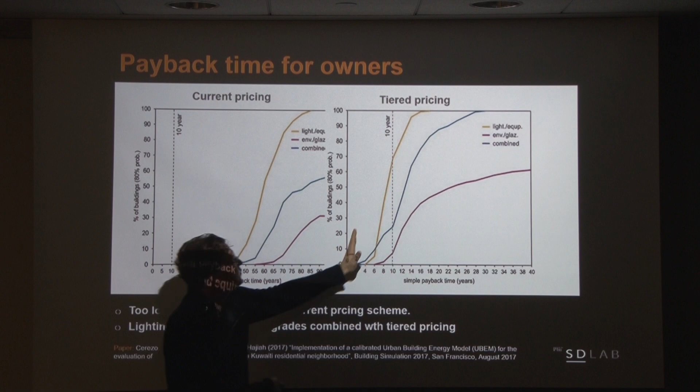So in order to show that this is the case, here's our payback analysis. If you have the current pricing, you basically have payback times of 50 years. That's not very attractive. And when you have some tiered pricing, we bring it to a lower level.

What happened in this study? It's like a partial success. Basically they said, that's great, we'll introduce higher pricing, but only for the expats. Everybody else keeps the same. So it was an attempt, but for us it's interesting because we want to see what is happening, what's the impact.

Then we had a more playful application. This is with the MIT Media Lab, with Kent Larson's group, where we built a real-time version, a Lego table of our tool. We developed this game with 18 different Lego pieces, and you could design your city, and we were projecting the results live on top of it.

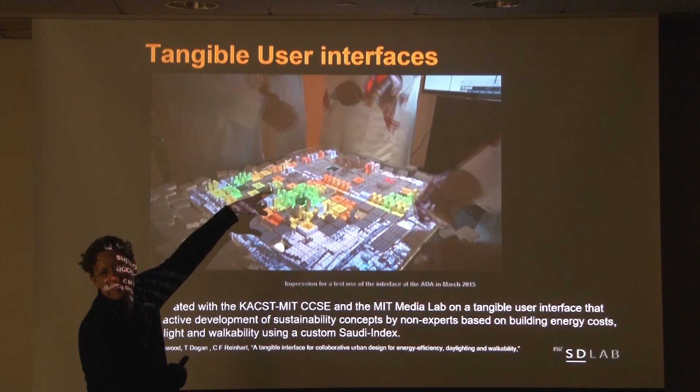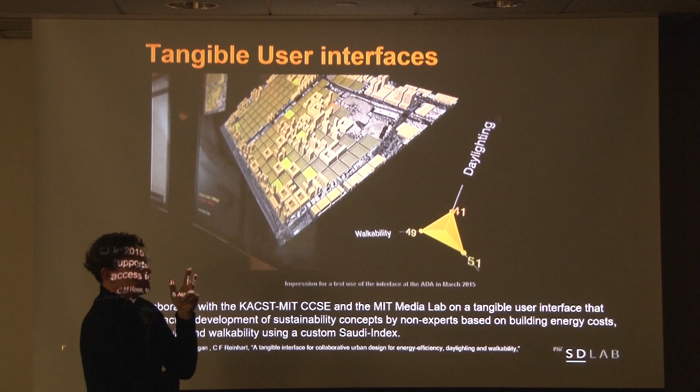We just wanted to see how people are responding to daylight, energy, and walkability. This is the planning board in Riyadh, and we have some great footage of people arguing in Arabic over the Lego table. It shows that it's a good tool to engage people.

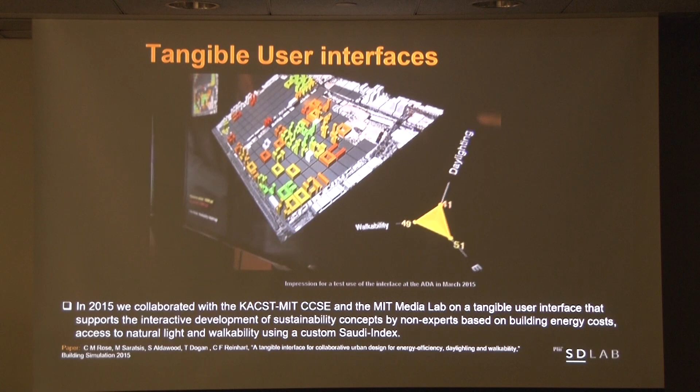We then did this once more during MIT Open House. We had 2,000 people walk by the table, and 20 people accidentally kicked the table. So we spent all day just cleaning up the Lego pieces. Then people left their kids with us, unbelievable, and the kids started stealing the Lego. So I'm not fully convinced that's the future for urban planning.

So what we're doing instead, and that's my second to last slide, we work with online tools where anybody interested in upgrading their community sees their house or the house of their neighbors, and you get a budget. Just by clicking, you can say I want to upgrade the energy use, the water faucets, or the PV of the whole neighborhood, and basically see how many jobs I'm creating and how much good I do.

The idea behind this is that we have more collaborative urban planning. Everybody says, this is my best shot of spending $50 million. Then you submit your proposal, and at least the city can get a sense of what the citizens want. It's based more on science than just thinking, I heard PV is the be-all and end-all solution. So it helps you become a little more nuanced.

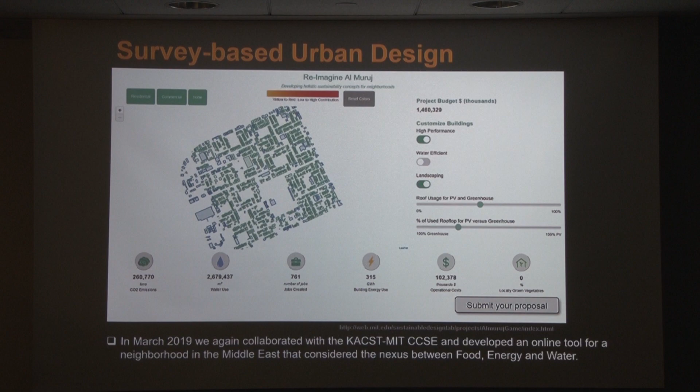So some final thoughts. Net zero is something that as individuals we should start considering for our buildings as fast as we can in the next years. Don't buy a gas burner. Anybody here? When it comes to cities, the question becomes a little more nuanced and wider.

We cannot just look at energy use. We also have to look at all the other aspects of the environment that I talked about. Do we have good access to daylight? Can people walk? Is there economic opportunity? Because if we don't get this right, the first point is not going to happen, because people won't have the means of doing that. And of course, financing can be a challenge, so we will be spending more and more time in our lab trying to at least call out this mismatch and hopefully find financial schemes on how to overcome it over time.

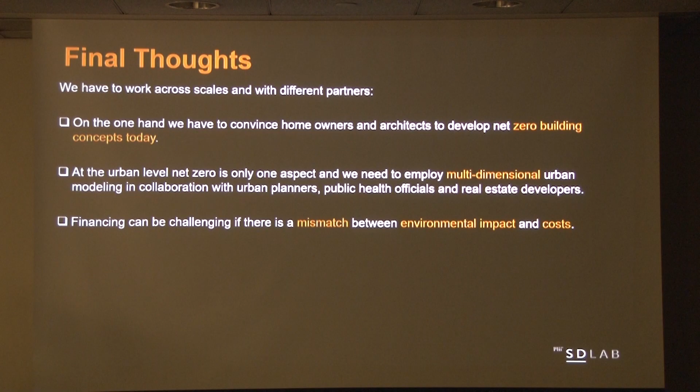And with that, I thank you for your time.